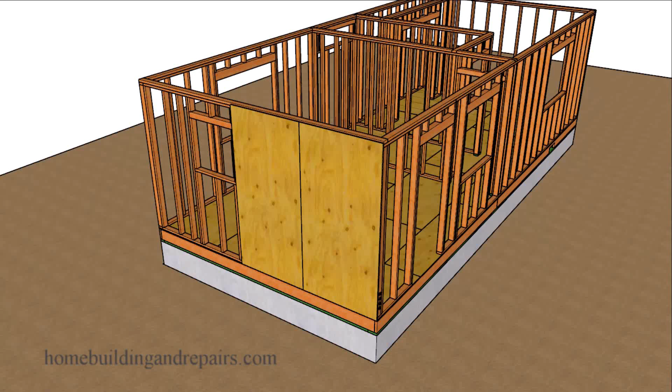In this video, I will try and provide you with a better connection, or at least in my opinion, it's going to be a better connection for a shear wall that's going to have hold downs that are going to connect through the floor to the building foundation.

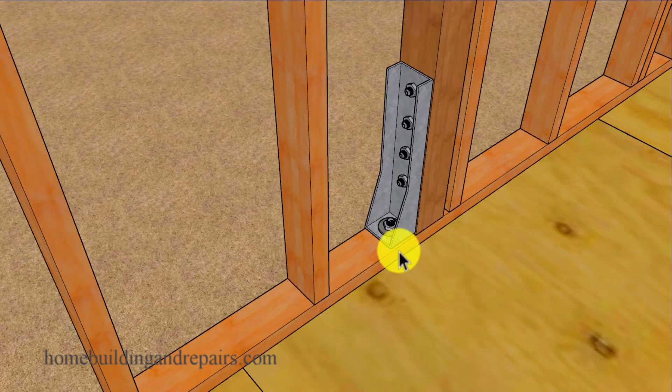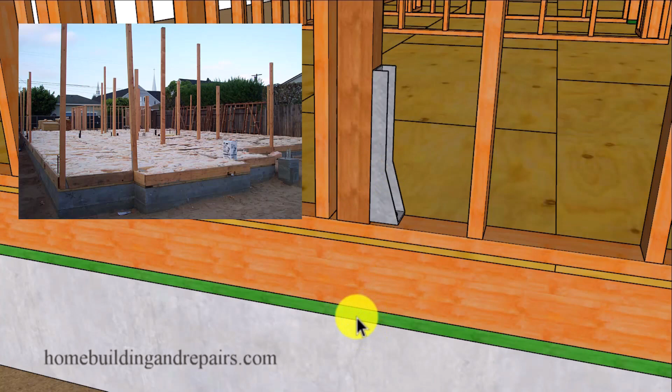And I've used this method before, but since I found a better method, I probably will not be using this method again unless it was specifically specified by a structural engineer. Because I would rather connect the 4x4 to the building foundation, so simply lower the hold down and the post instead of having it like this.

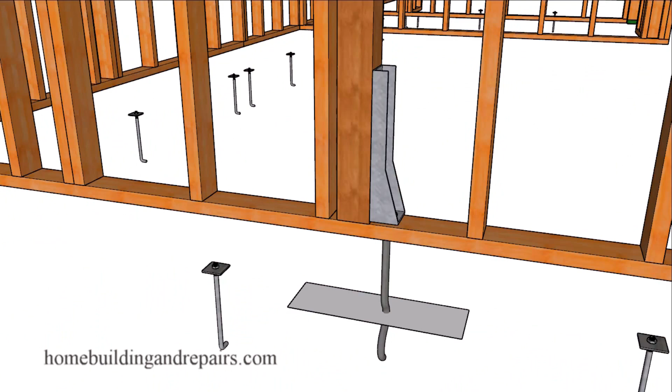And one of the problems you're going to have if you do something like this and you use the anchor bolt required by the manufacturer of the hold down will be that it might not be embedded into the concrete far enough if you actually do it this way, which you're not going to. Most people are not going to do something like this because it's not going to meet the manufacturer's requirements.

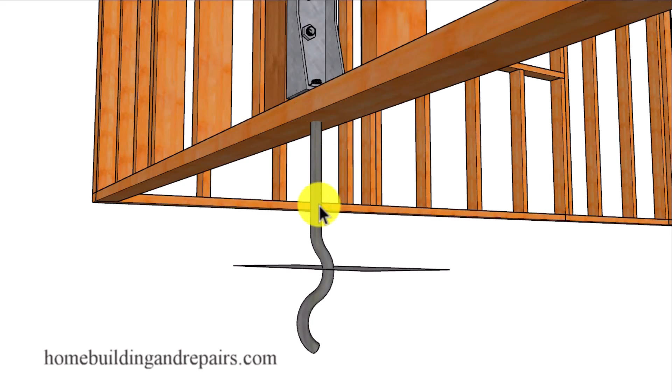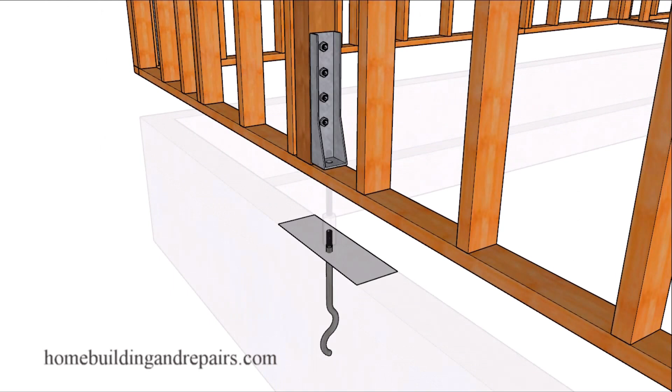So what they'll do instead is lower the anchor bolt so that it does meet the manufacturer's installation instructions, and then add a coupler or a coupling to it. However, you will need to check with the manufacturer to make sure that you can use a coupler for something like this. I would imagine with larger hold downs, you might not be able to use a connector. So make sure that you run this by your structural engineer also. Don't just rely on the manufacturer.

And yes, I've seen problems created by using couplers on the jobs. So just don't rely on the manufacturer for something like this. Check with the engineer whose name is on the building plans. And again, do not get a verbal okay for this. Make sure that you have something in writing. Otherwise, you are going to be paying for any repairs and not the person who okayed this over the phone.

Another thing you might be able to do, and this might be on your building plans as another alternative also, would be to use a longer connector like an all-thread that's going to have something like this on the bottom. You might have a nut on the top with a large square washer and another nut on the bottom that can be firmly embedded into the concrete.

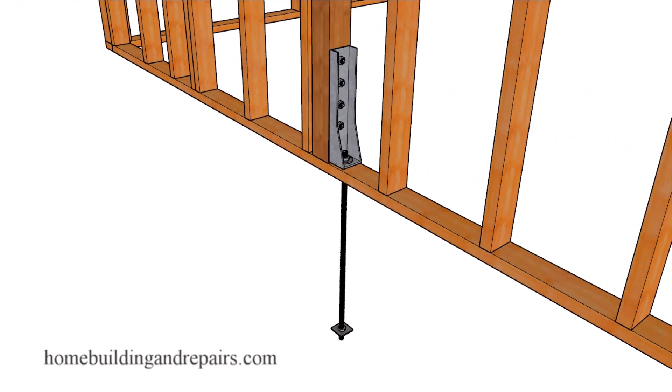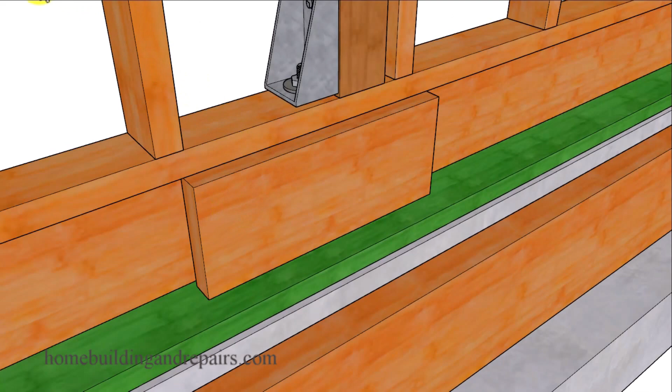And again, I've got to stress this. This might not be an approved construction method for your project. However, if it is, make sure that you add a block, something like this, in the floor framing to get some additional structural support for the hold down going through the floor framing.

Next up, let's go ahead and take a look at the method I like the best. And again, that would be running the 4x4 down to the top of the sill plate that will be sitting directly on top of the building foundation. And with this method here, you're not going to need a coupling or the all-thread. And in my opinion, you're going to create a stronger shear wall because now you're not going to be relying on a load transfer through the floor framing.

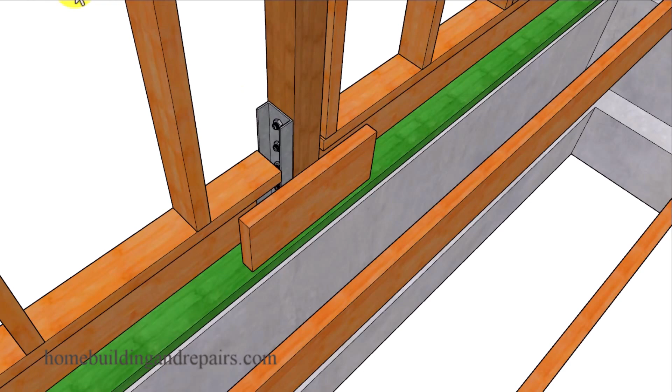Now keep in mind that something like this is going to be a little more difficult for the framing contractor to build and might require a few more dollars. So it wouldn't be a bad idea to figure out the cost difference between doing something like this on a project that might have a lot of hold downs. Another thing you're going to need to do will be to add a block, and that block should extend a little bit past both sides of the 4x4.

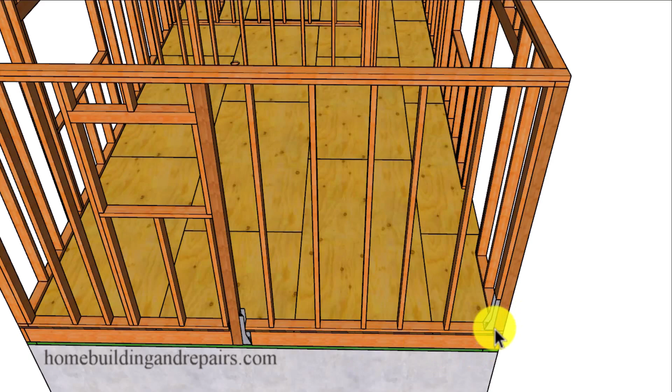And let's go ahead and take away the wall framing plates to give you an idea of what something like this is going to look like before you lay out and frame the walls. And in some situations, even though I've never run into this, you might need to use both methods. Connect one to the foundation, one to the floor framing in order to avoid a specific problem you're going to run into on your project.

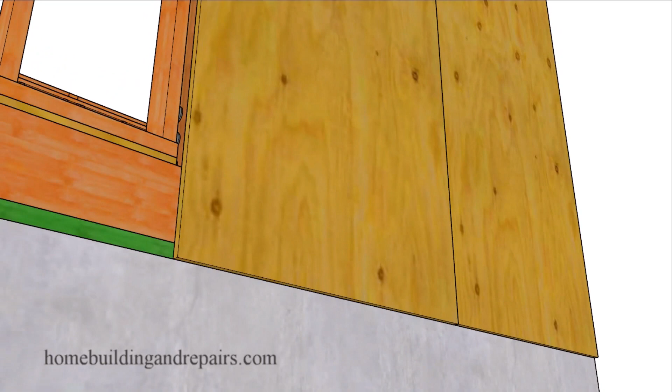Now, another thing that's going to add a few more dollars to your project will be the longer shear panel or the additional amount of shear panel required to extend the shear wall all the way down to the building foundation.